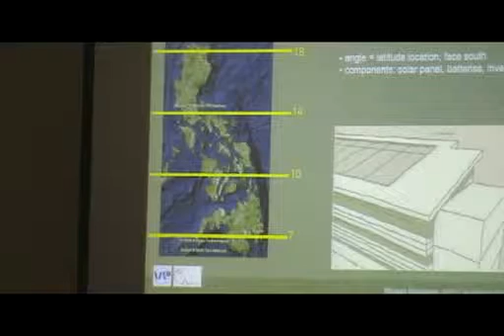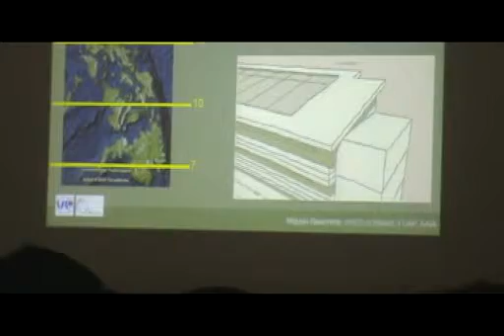Now let's go to renewable energy. Solar energy. This can apply to solar panels, to solar water heaters, to solar absorption chillers. Take note of this. This is the latitude we are above the equator. Davao is 7 degrees above the equator. Cebu is approximately 10. Manila is 14. Pagudpud is 18 degrees above the equator.

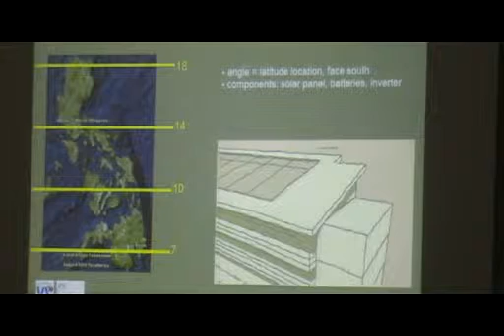Now, how do you orient your solar panels? The solar panels have to be oriented south. South in the Philippines. Why? Because the sun goes from east to west on the southern side. Not east, you only get morning sun. Not west, you only get afternoon sun. Not north. If any of you who have attended this lecture put the solar panel on the north, you were not listening and probably sleeping during this lecture. Don't put it facing north. The sun is not there.

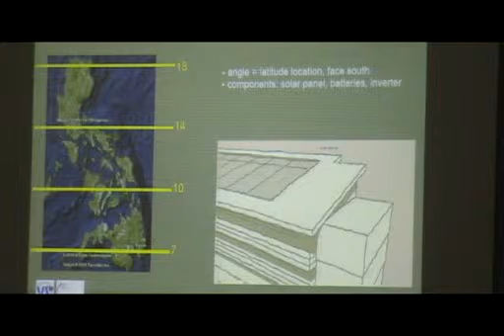So south. At what angle? It's the angle above the equator plus 15 degrees, 1-5. So for example, if you're in Cebu, you would orient your solar panel minimum of 10 degrees plus 15. Remember that the sun moves about 15 degrees during the year. In December, it's farther down south. In June, it's farther up. So that's why, if you want to maximize it, you're better off putting it at 15 degrees so that you get the sun at its lowest point. Okay, so that's the rule.

Now, why am I saying this? Even if Louis said solar panels are expensive, solar panels are great. All they need is a solar panel, storage battery, an inverter which converts the DC direct current into alternating current. It's expensive, about 120,000, 130,000 per panel of maybe 60 by 140, and that gives you a power output of about 120 watts, which can power up 2 electric fans. I'm just giving the equivalent. Why am I saying this?

So that if you're going to retrofit and you have to change that, at least put a roof or incline something already at this angle, so that when China is making solar panels by the billions, and you can buy a solar panel in the sari-sari store for 50 centavos, then all you do is sampak mo na lang sa roof. It's all set, di ba? So that's why I'm bringing this up to you, so that at least you can already look at your building and see if you can put a roof oriented to the south at the proper angle, so that when the time comes, you can just put those panels right on there, and that would be a perfect location.

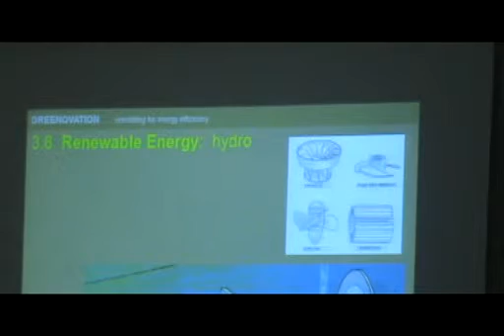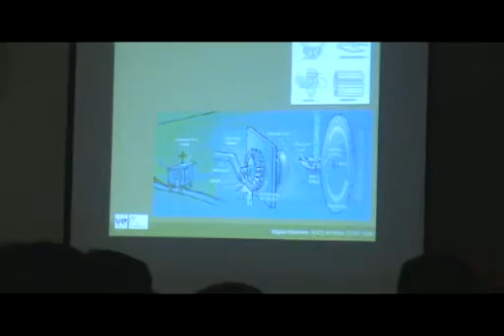Second, hydro. You know hydro. The smallest level of hydro is picohydro. It uses water to turn a turbine which generates electricity. Of all the renewable energies, this is the most efficient renewable energy. Why? Solar, you're dependent on the sun, and you need storage batteries. Wind, same thing, depending on the wind. But if you have water, if you're beside a creek, if you're beside the river, utilize it, because then that is constantly moving.

Now let me tease your imagination a little bit. If water is the most efficient thing, then all you need to do is turn that turbine. Let me give you a concept I've been toying around with for many, many years. It's a complete cycle. Imagine creating a water tower. Water tank above, a pipe going down, computed with enough head, run a turbine, run a generator, produce electricity, have a catchment of water below, and then pump that water back up to a tank, and that is a closed cycle.

How do you get the water from here to there? I've discussed it with so many engineers, and I've got so many ideas now. One, you can use wind, like a windmill, to bring the water up. You can use a solar panel, power a pump to bring it up. Or you can even use what is known as a ram pump, R-A-M-P-U-M-P. The idea of a ram pump is that even with a 1 meter head, you can drive water up 10 times that height.

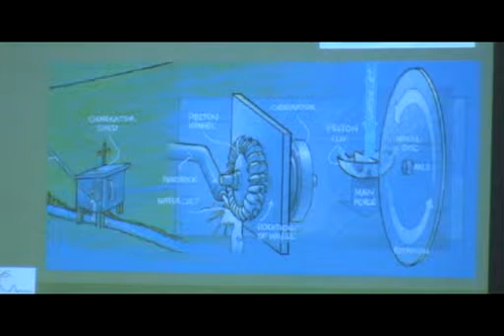So, interesting thing. I was thinking, if you can develop that, you probably solve the electrical problems of many people in the Philippines who are off-grid, who can at least power up their lights, maybe their ref, and maybe their cable TV. Beyond that, mahirap na. Okay, so renewable energy, think about it. If you're building near a water source, look into this possibility.

Wind. There are two types. Wind turbines, the standard thing, and the other thing. Now, why do I talk about this? If you have an air conditioning system in your building, retrofitting, and your compressor is blowing hot air, aside from getting the hot water out of it, do you know that you can actually attach a small fan to that thing and generate electricity?

If you're running a hospital and that air conditioning is running 24 hours, that is a perfect thing to use to even power up all your interior corridor lights, which are on the whole time, and you're going to power it up with actually the same cost you're running your aircon. Okay, so just teasing your imagination, so that really, in the end, when you look at renewable energy, it's a matter of analyzing what is there, what are the resources being utilized and wasted, so to speak, in the building, and try to see if you can maximize it.